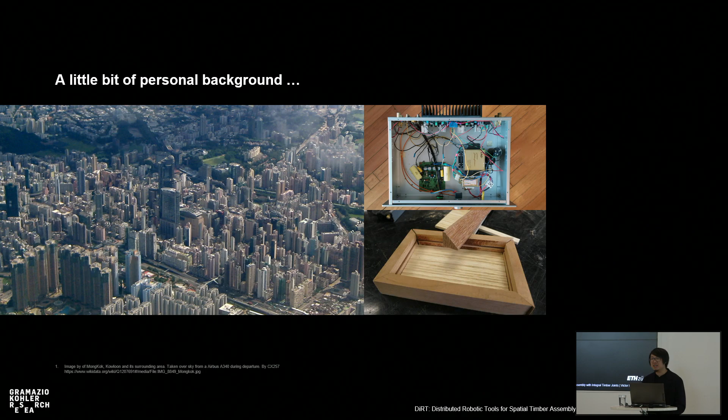Before I introduce my topic, allow me to introduce a little bit of my personal background. So I grew up in Hong Kong, and if you know anything about Hong Kong, well, there's no space. As a kid, I stayed at home a lot, and thanks to my father's influence, I picked up a lot of indoor hobbies like electronics and woodworking. Being a 90s kid, I also picked up computer programming for fun.

When I entered architecture school, digital fabrication was just starting the revolution. But I immediately clicked with the idea of programming machines to make things. For the two years after my bachelor, I joined a startup company that was trying to build bespoke timber pavilions. It was a three-man show, so I had to do everything from designing timber joints to programming CNC machines. But what I was really proud of, at least from a technical point of view, is the automated workflow from design modeling to the generation of G-code.

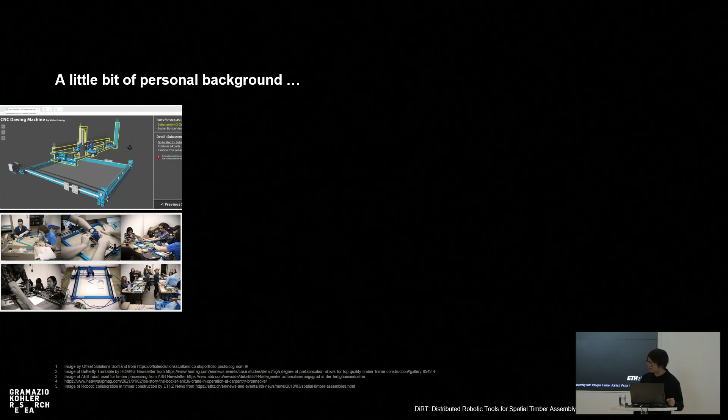However, later on, as I joined MIT for my master's degree, I realized that everybody doing digital fabrication is doing the same thing. So I decided to look at what is the next step after machining, and that, for me, is assembly. My thesis back then, which provided the groundwork for what I'm presenting today, was about how designers can spend a little bit of extra effort during modeling to annotate the assembly motion and sequence of things. That information can be used to generate interactive instructions for showing how things are put together.

The topic that I'm presenting today may look larger and more complex than putting toys together. But it is the same motivation and the same curiosity of extending digital fabrication beyond fabrication to the assembly process that follows it. The title of my PhD thesis is Distributed Robotic Tools for Spatial Timber Assembly with Integral Timber Joints.

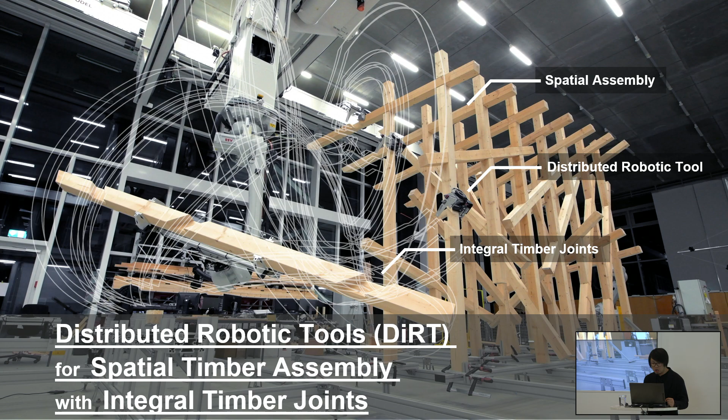Distributed robotic tools is a term that I invented to describe the robotic end effectors that are detached from the robot, which is the focus of this study. Spatial timber assembly refers to assembly that happens in 3D space, as opposed to planar assembly that are 2.5D. Integral timber joints often refer to tight-fitting carpentry joints, but its defining characteristic is really about the structural load that is transferred from wood-to-wood connections.

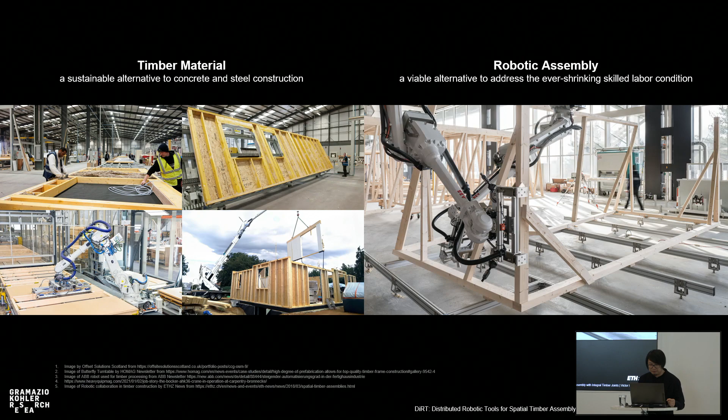The larger picture that motivates this research is that automated timber assembly is becoming more and more relevant. Timber as a construction material is re-emerging as a potentially more sustainable alternative than steel or reinforced concrete. Robotic assembly can also be a viable alternative to address the lack of skilled labor in the construction sector. Moreover, our institute is one of the very few places on Earth that has a large-scale robotic facility, the RFL downstairs, that is capable of developing and prototyping robotic processes at an architectural scale.

Now, let me start with a short summary of the current state of automation in the field of timber construction, looking at it from the perspective of how information and material are combined during construction.

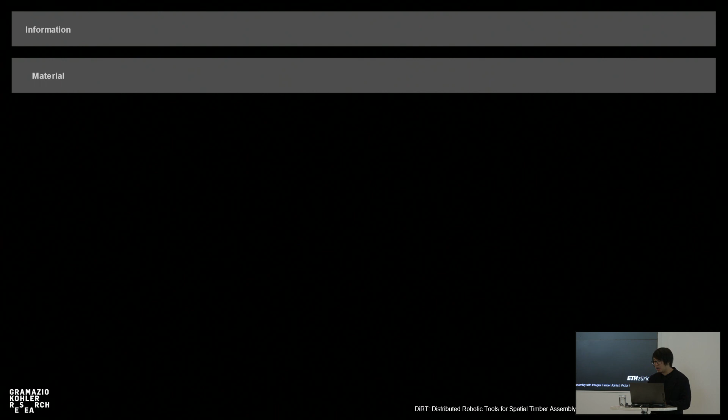The first step in the timber construction process is raw wood processing, which is already a highly automated process with a mass production paradigm. The second step is the beginning of a data-driven and design-driven process.

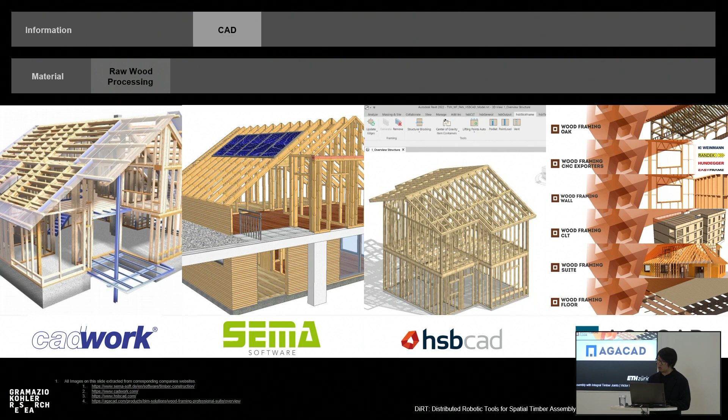The workflow includes architectural design, joint design, and structural engineering. In order to support this information-intensive workflow, specialized CAD software have already been developed by the industry.

For the fabrication of timber parts, automatic joinery machines have been developed for more than 30 years, and there are a handful of manufacturers that make them. In general, planed timber elements enter the machine from one side, get machined, and exit from the other side. Inside the machine, there are different machining tools for making all the joints needed for an entire timber project.

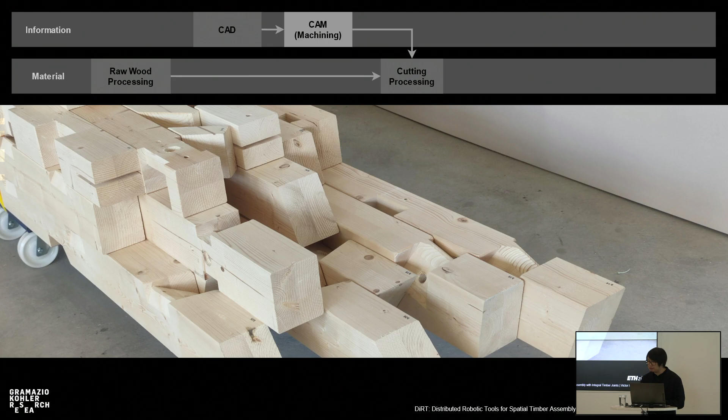However, what is special about this machining process is not just the machine, but rather how the machining programs are generated automatically. You see, in timber construction, there are many geometrically unique components, and if they are processed using a traditional CNC workflow, a programmer would need to click through every one of them.

Fortunately, in the timber machining industry, this step is mostly automated, allowing the CAM software to automatically parse each and every unique component and generate their machining programs automatically. This workflow is quite unique, and it means that not only are the joinery machines automated, but the generation of data that would go into these machines is also automated. The automation of these two parts, the digital and the fabrication, are the fundamental components for digital fabrication.

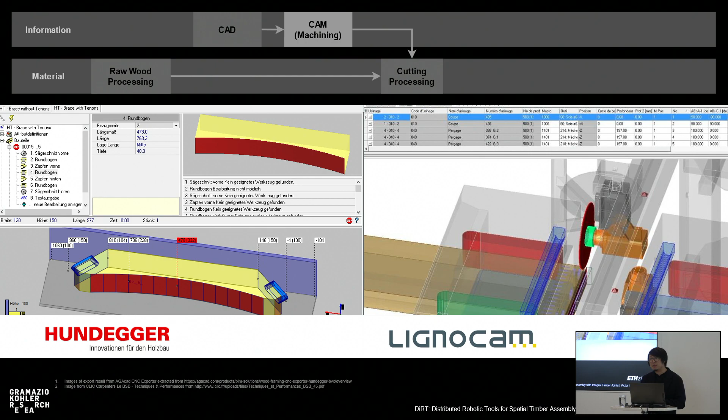In contrast to the machining process, the automation for assembly, which is the core topic of this thesis, is less developed. In the industry, the advancement was mainly focused on the assembly of planar prefabricated parts. For example, machines have been developed for light timber frame construction. These automatic systems combine timber machining and various assembly stations for making prefabricated walls and floors.

Similarly, the assembly of floor trusses and roof trusses. You may notice that all of these machines look like an assembly line. In fact, these machines are often optimized for a specific geometry and therefore are not so flexible for accommodating custom designs.

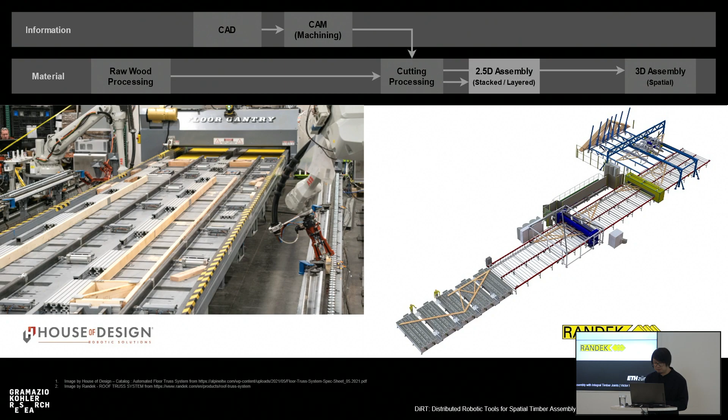In addition, the CAD and the CAM software for designing these assemblies and controlling these machines are proprietary systems. This limitation, combined with an inflexible machine setup, limited their application to utilitarian designs. In many cases, these timber components are designed to be hidden away from the architecture, and therefore we are not very interested in these things.

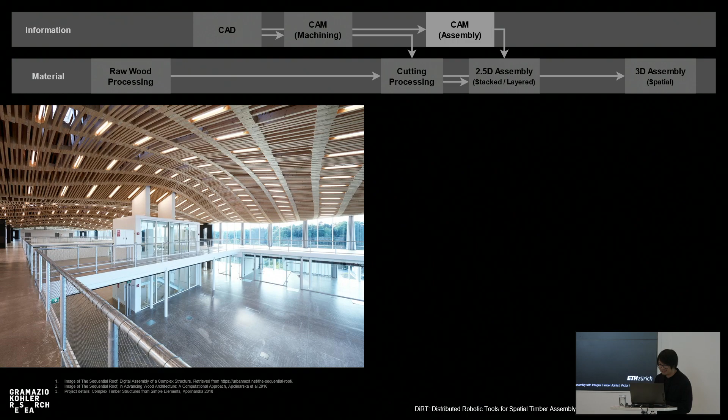Perhaps a counterexample of a very complex yet attractive design is the sequential roof that is right above us. Despite its fluid appearance, it is still a planar assembly. Notice that the automated gantry robot for assembling it is not even as complex as the robotic production lines we saw. The main difference, I think, is the automation of the digital workflow.

In this case, it is not just the cutting instruction that is automated, but also the assembly instructions for the robot. While this project has demonstrated a high level of automation for bespoke planar assembly, my thesis investigates whether similar automation can be applied to robotic arms doing spatial assembly.

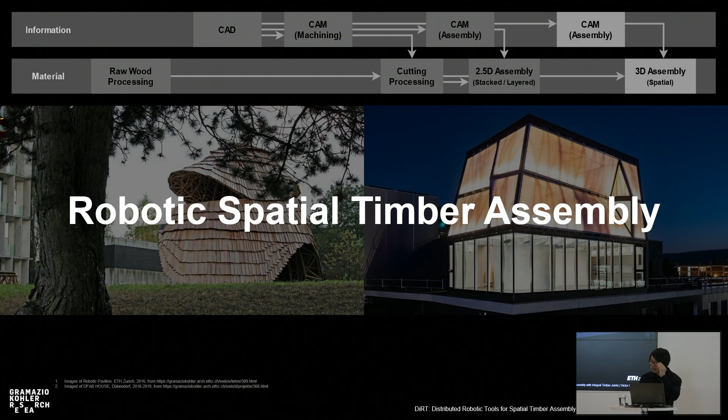So what is special about spatial timber assembly? There are many things, but one thing for sure is that we don't find many examples in the industry, and the state of the art is mostly in research projects. For example, the MAS DFAB Robotic Pavilion that some of you actually participated in, and the DFAB House Spatial Timber Assembly.

The challenges involved in spatial timber assembly can be roughly characterized into 4 types. I will explain what they are using the DFAB House project as an example.

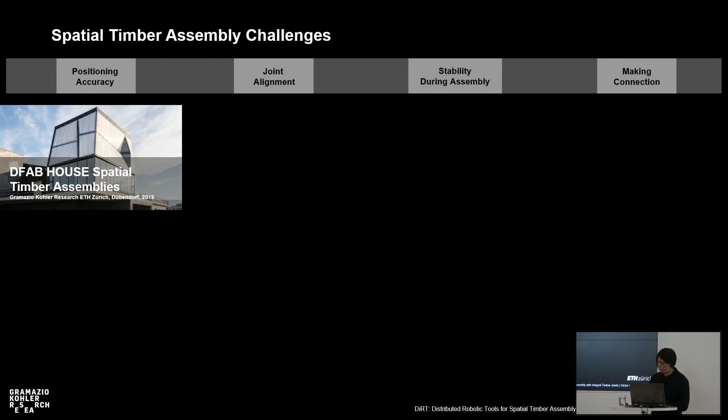Being one of the earliest spatial timber assembly projects, the researchers found that the accuracy of a large-scale robotic platform is much lower than what is needed for timber assembly. And this is the first challenge, positioning accuracy.

Fortunately, our lab is equipped with an indoor optical tracking system called the iGPS, which can monitor the position of the robotic gripper accurately and therefore make closed-loop corrections. However, when dealing with long timber elements, the accuracy at the 2 ends of the beam is much worse than the middle. The researchers found that it was not possible to assemble simple joints like this one.

This is the second challenge, joint alignment. In this project, the researchers decided not to use integral timber joints at all, and they circumvented the problem by using butt joints, accepting the misalignment, and fixing the incorrect geometry later.

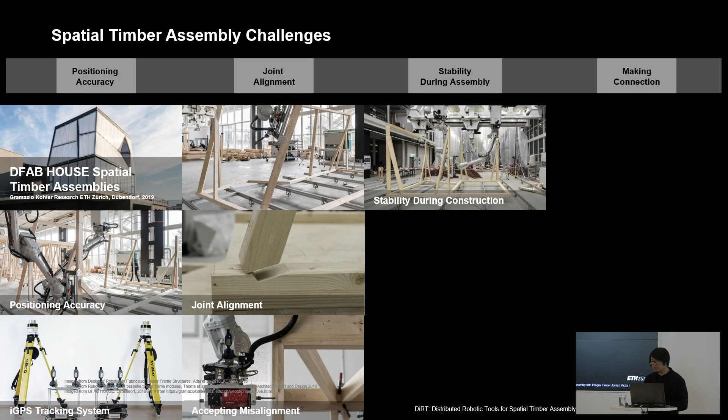The third challenge is stability during assembly. This is the major difference between a planar assembly that can be easily supported on a planar platform and spatial assembly, which because of gravity tends to fall down. Here, the researchers addressed this problem by first assembling the corners of their modular timber boxes, which formed a stable tripod to support the rest of the structure.

Finally, the fourth challenge, which is also the problem that is least addressed, is how to make connections automatically. In the DFAB House project, this is not addressed at all. The robotic process has to be stopped, a worker has to set up a ladder, install the fasteners, and this back and forth repeats for every timber element.

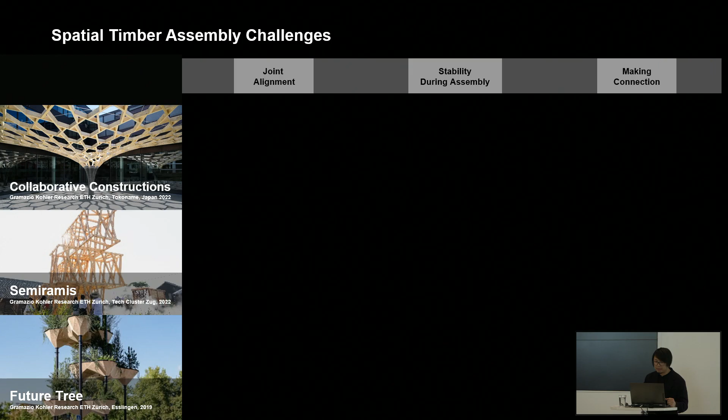Among the 4 problems, only the positioning accuracy problem is more or less resolved. The other 3 problems can be seen in other spatially assembled timber structures, in one way or another. These challenges limited the choice of timber joints for robotic assembly, and in many cases, to structurally less efficient ones. In some of these examples, the robotic process even required more manual operations than robotic operations.

The only relevant robotically assembled timber joint project is a research called Robotic Integral Attachment. The researchers found that using a robotic arm to push tenon joints into the mortise side is not a good way to tighten them. Although they did not explain in detail why, I do suspect that the pushing force from the robot is not enough, and the fact that they are pushing only from one side.

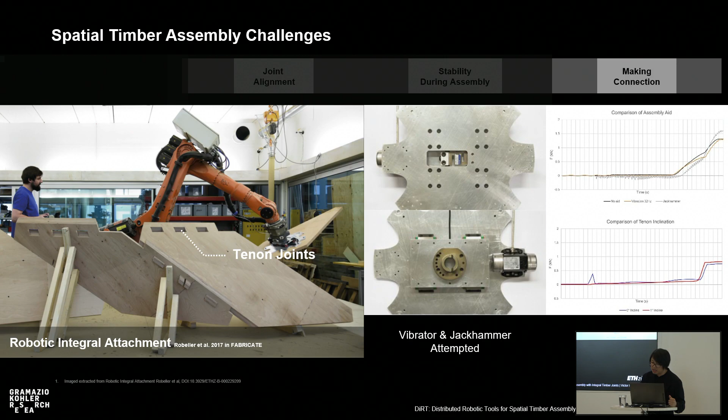While these previous projects may have addressed 1 or 2 of the challenges that I mentioned, a combined solution has not been attempted before, and therefore I decided to use an exploratory research method to conduct this thesis.

This method may be unfamiliar to some of you, so here is a short introduction to what you're about to see. I started the exploration by developing an assembly method that is considered a working hypothesis. While this hypothesis did not solve all the problems at once, it is through many observations and small iterations that the hypothesis was refined and improved. And it is during this iterative process that knowledge is generated by making new discoveries and understanding new relationships.

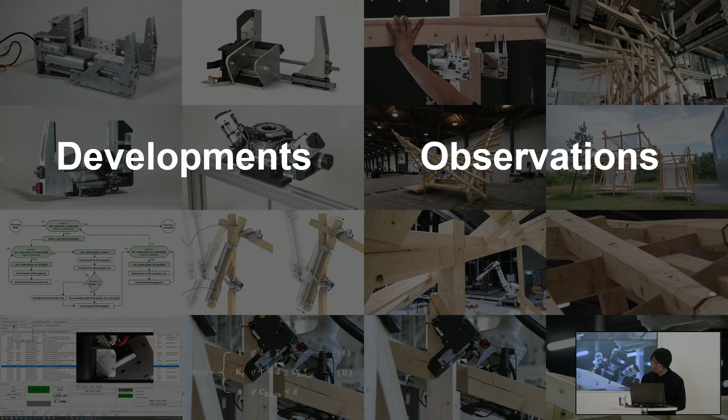In the rest of this presentation, I want to give you an idea of what these developments and observations look like. However, because there are many topics and limited time, I will only be able to say 1 or 2 sentences for each of these topics. If you're interested in some of them, I'm happy to get into the details after the presentation. If you find it hard to follow, I promise it will make sense at the end. So, let's begin.

The entire thesis can be divided into 5 exploration phases. The first phase started with prototyping of a clamping tool. The second phase went on to test the clamps with the robots. The third phase focused on complete automation of both the digital and the robotics workflow. The fourth phase tested a screwdriver concept. And the fifth phase focused on integration with other disciplines.

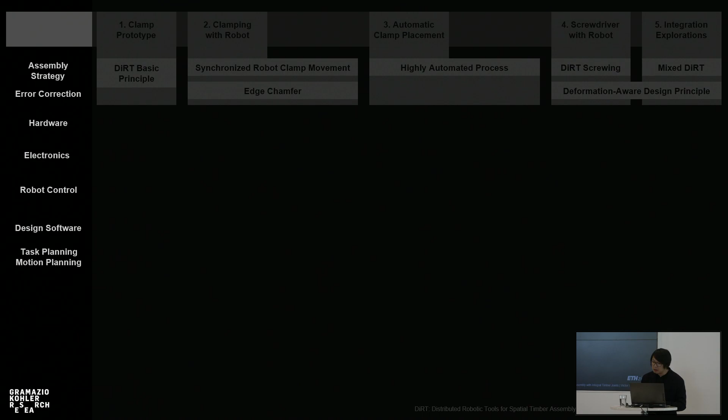These descriptions are extremely simplified. In reality, each phase contained many developments and experiments. For example, the development of assembly strategies, such as how to apply assembly force and deal with inaccuracy. Mechatronics development, including hardware, electronics, and control software. Finally, similar to my master thesis, studying how timber structures can be designed such that the robotic assembly instructions can be automatically generated.

3 large-scale demonstrators were designed and constructed during rounds 2, 4, and 5. And after each phase, a thorough analysis was performed to understand what is working, what is not working, because understanding why is the most important goal in this thesis.

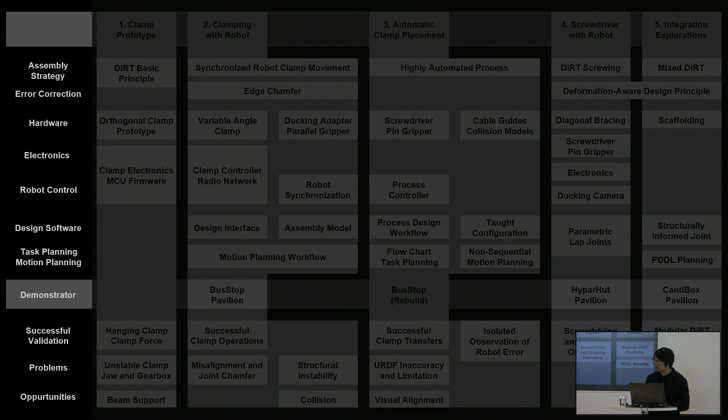In the first exploration phase, the focus was to start by addressing the problem of making connections. By observing manual assembly processes and the tools that they use, I had the idea of deploying multiple assembly actuators, 1 at each mating joint. By using multiple actuators, it is flexible to position them wherever the joints are located. However, it would be difficult if each of the actuators requires a robot to hold it. Not only because robots need space to maneuver, but because it is not scalable.

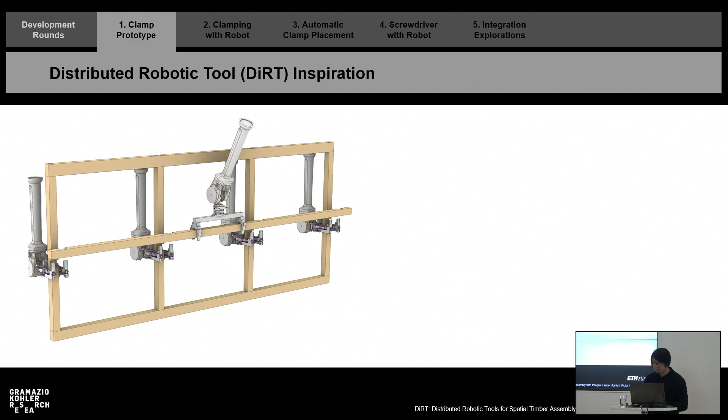Therefore, I hypothesized a scenario in which the actuators are attached to and hanging from the partially assembled structure. The attachment of the tools can therefore be performed even with 1 robotic arm. After all the actuators are in place, the same robotic arm can bring the next piece of timber towards the joint for the assembly. Because these actuators are no longer tethered to the rest of the robotic system, I call this a distributed robotic tool approach, and therefore the acronym DiRT.

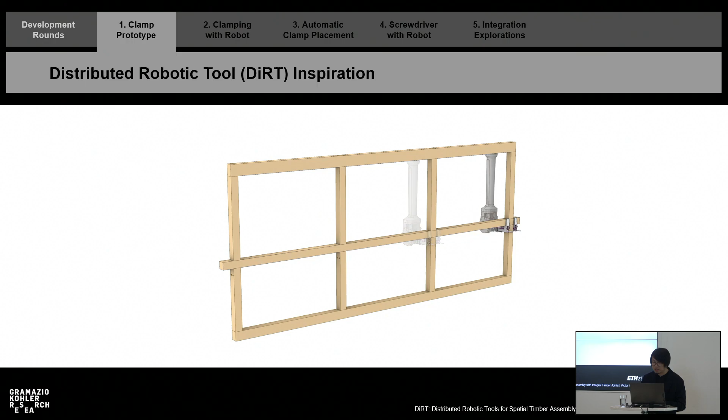One of the challenges of using distributed devices is to control them to make them move synchronously. In addition, the robot needs to attach the tools to the structure and to retrieve them afterwards. The first prototype is a robotic clamping tool, designed to assemble lap joints that are 90 degrees.

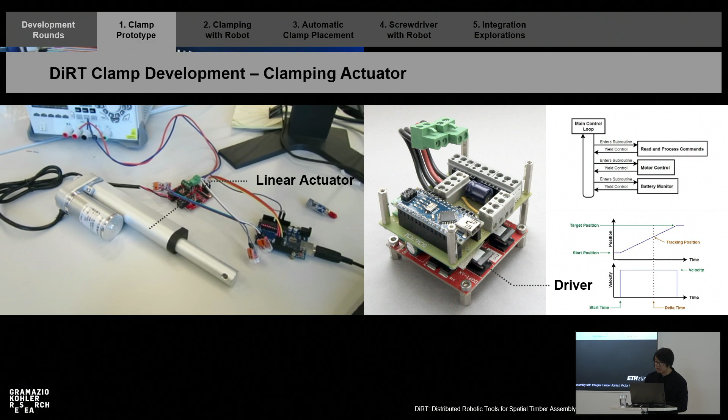I started by measuring the clamping force required for tight-fitting lap joints. This gave me an estimation for the selection of linear actuator and motor driver used for the clamping action. Then I designed a hanging mechanism that would allow the clamp to hang onto the wood.

This proof of concept device allowed me to test two of the most important operating principles in the DiRT concept. The first is the ability for an end effector to operate while hanging from the timber beams. Apart from the orientation you see here, other orientations have also been tested, and the hanging works pretty well.

The second is the application of assembly force locally at the joint. The clamping mechanism operated smoothly without any wedging or jamming effect during joint closure. This is interesting because lap joints with parallel faces behave like an old wooden drawer—you need to close them carefully while ensuring they're parallel to avoid jamming.

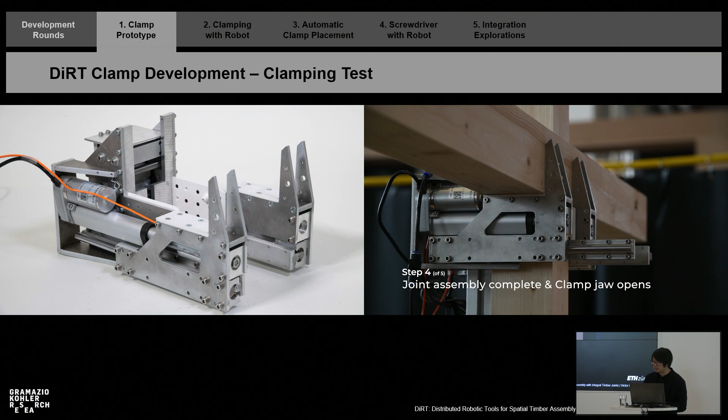However, what was found here is that jamming is not a concern, which also means that many traditional lap joint designs can be clamped robotically.

Regarding the mechanical hardware, one of the actuators broke after I repeated the experiments a few more times. However, this was actually good because it gave me a better idea of how to design the hardware in the next iteration. Specifically, the design philosophy is now that the motor should enter protection instead of mechanically destroying itself.

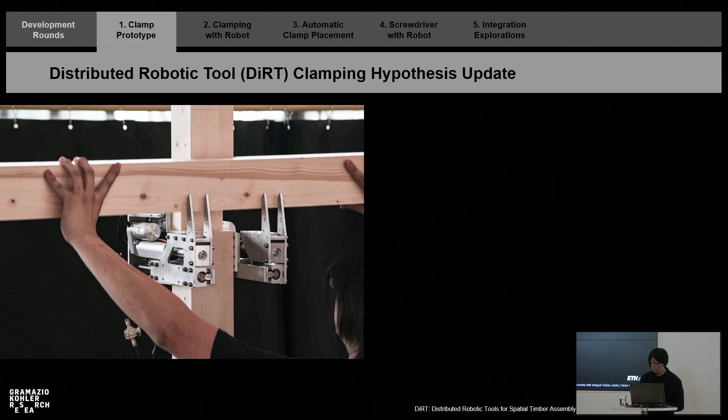Regarding the assembly strategy, the demonstration also revealed a serious problem with my initial hypothesis. The idea that the robot can let go of the timber and give it to the clamp is not very generalizable, and that can only work in this perfectly balanced posture.

Therefore, in subsequent exploration, I decided to have the robot hold onto the beam and support its weight during clamping. This way, the clamp does not have to support the beam, and the beam is free to be in any orientation.

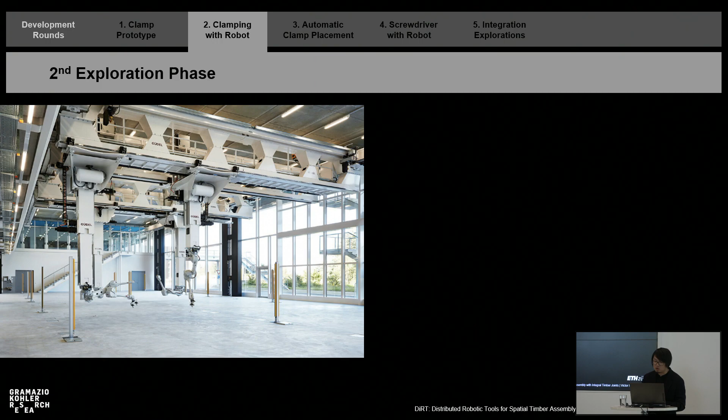In the second exploration phase, it was much more ambitious. The goal was to integrate the clamps with the robotic arm in RFL and to test their operation by assembling a large-scale demonstrator. Another ambition is to redesign the clamp to accommodate angled lap joints.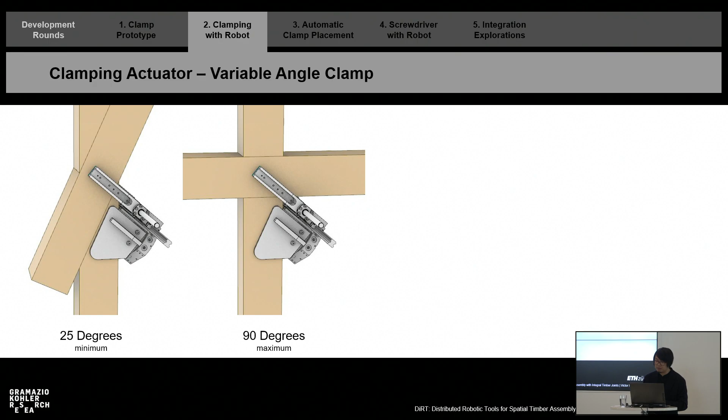The new clamp design used only one clamp jaw instead of two and relocated the hanging gripper mechanism to the side of the beam. This way, the clamp can accommodate lap joint angles ranging from 25 to 90 degrees, and a mirror version of the clamp was designed to accommodate angles from 90 to 155 degrees.

On the electronics side, an embedded controller was implemented to control the motor and to allow wireless communication. The motion control algorithm is key to allowing synchronization between the clamp and the robots.

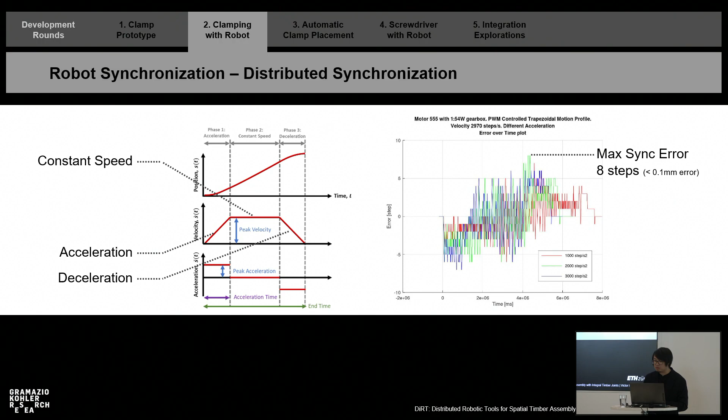The principle is based on a mutually agreed motion profile that would start and end at the same time. The wireless network was also a custom implementation, optimized for low latency and high reliability even when there are occlusions.

The synchronization control is based on a concept called distributed control system. It allows individual robot controllers, such as the clamps and the ABB robot controllers, to report to a top-level controller that is responsible for their synchronization.

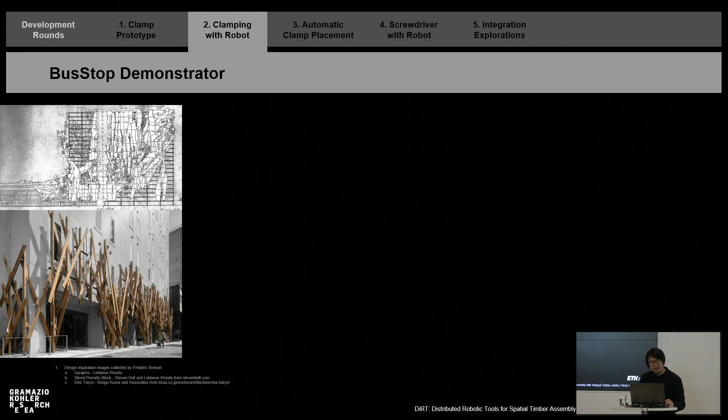Finally, the large-scale demonstrator was designed by an MAS student, Frédéric Brisson, also in collaboration with Dr. Davide Tanadini from the chair of structural design. He is a long-term collaborator under the same NCCR research umbrella.

While the demonstrator was intended to look good, it is also intentionally designed for studying different clamping orientations, with up to 3 simultaneously moving clamps. Apart from those, there are some foundational pieces that have to be fixed manually to the ground.

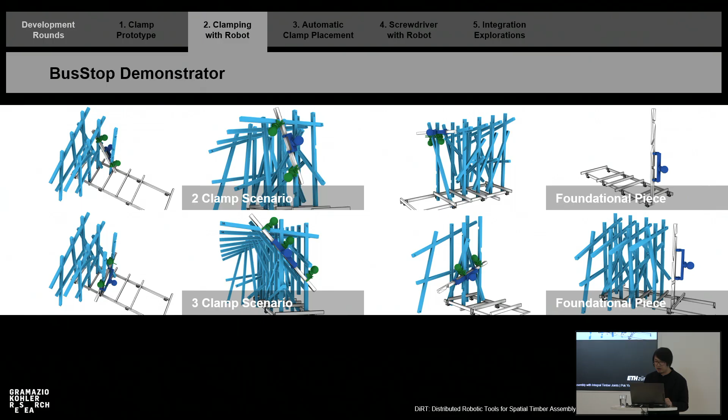Being the first large-scale demonstrator, the focus was to validate the most difficult part, which is the synchronous clamping movement. What you're seeing here is the robot using a parallel gripper to support the weight of the beam during the clamping operation.

While the synchronous motion worked very well, the main challenge was the poor alignment between the two sides of the joint. Here, different from the precedent project, the iGPS tracker was not used because of the amount of timber elements that would block the sensor from seeing their reference stations.

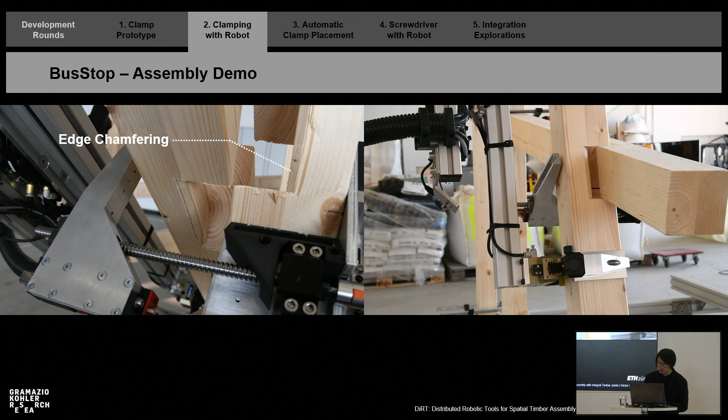Therefore, my plan to address misalignment was to introduce chamfering on the joint edges. When the joints are forced together by the clamps, the chamfering can provide a ramp that would guide the two halves into alignment. During the demonstration, I found that 5 to 8 mm of chamfering works most of the time.

However, in some cases, the misalignment was too big, and there was no option but to manually push the structure until they aligned.

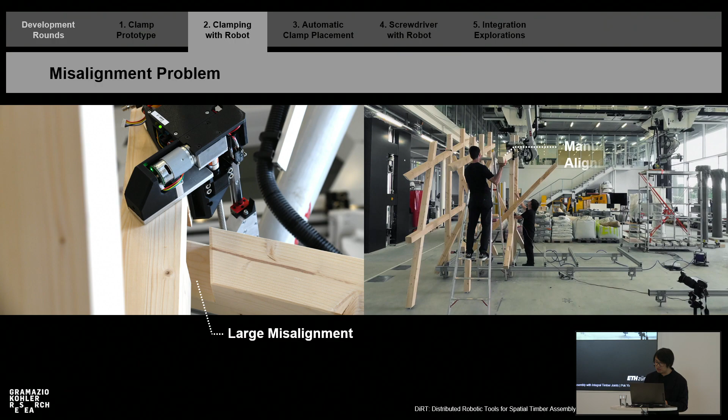In order to understand the misalignment problem better, I systematically analyzed the deviation error on the robot side and on the stationary side. On the robot side, I found that the mechanical connection between the robotic arm and the bottom of the gantry was not calibrated.

I also found that the Z-axis of the gantry is not stiff enough. This caused the entire robotic arm to swing from side to side by a small amount when the axis is fully extended. Finally, I found that the position error at the end of a long timber beam to be more significant than what I had hoped for.

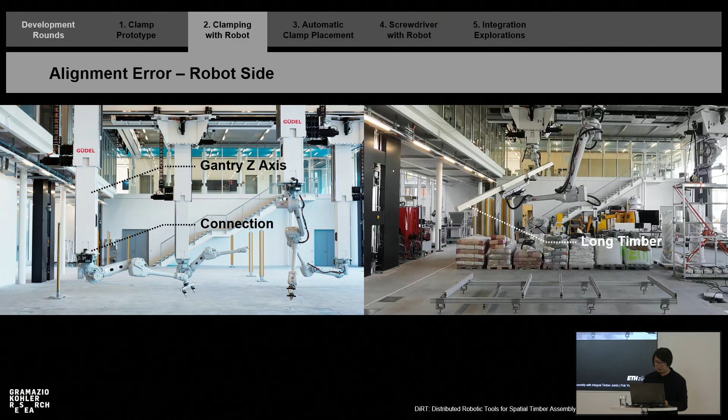On the stationary side, I found that the partially assembled structure can deform quite significantly, especially for the poorly supported beams. After all, the structure is by definition incomplete during assembly. This discovery inspired a new deformation-aware design principle in the fourth and fifth exploration, which we will explain soon.

In addition, I also found that lap joints in general suffer from low initial rotational stiffness, which is kind of a fancy way to say that there is a gap. Finally, the joints are simply held by friction, and they have a tendency to open up during the subsequent movement when there are small vibrations.

This discovery motivated the development of a screwdriver tool that I will show in the fourth exploration.

The second major test on this prototype is the beam transfer action. It is the robotic movement that brings a timber element through the obstacles into the partially assembled structure.

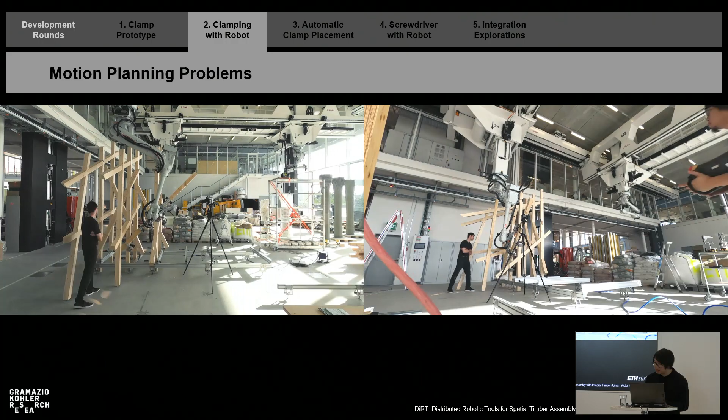Unfortunately, even using the latest motion planning algorithms at the time, they often cannot find a solution even after searching for a long time. In some cases where the algorithm returns, the solution can still be incorrect and contain collisions.

Fortunately, I got help from a motion planning specialist, Dr. Yijiang Huang, previously from MIT, now in ETH. Not only was he able to identify the cause of the collision problem, he also developed a custom collision checking algorithm specialized for timber assembly.

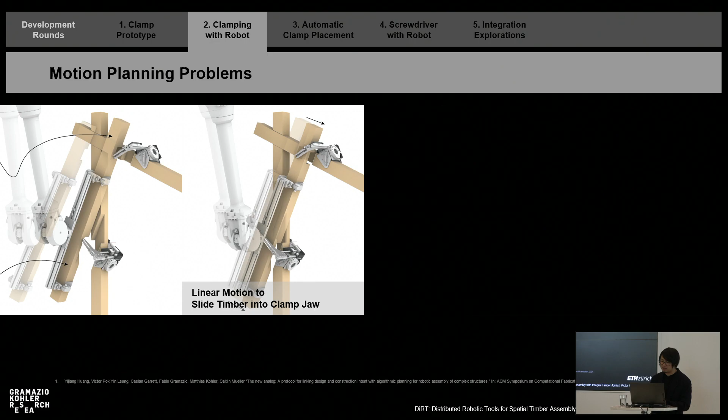We also added a short segment of linear motion to slide the timber into the clamp jaw, which turns out to significantly increase the planning success rate. Here you can see the linear sliding movement before the clamping movement.

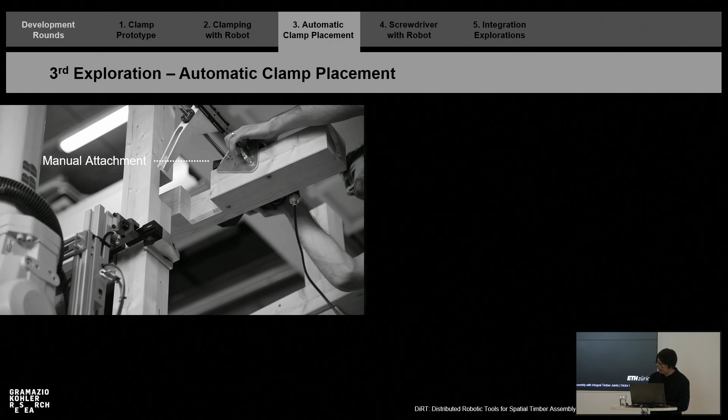The goal in the third exploration is to test the rest of the robotic process that was not yet tested. The highlights being the robotic attachment and detachment of the clamps on the structure. No new demonstrator was designed for this phase because the bus stop demonstrator can be used again for the new tests. The major challenge in this exploration is to plan the sequence of tasks that the robots needs to perform.

In collaboration with Yijiang, we came up with an easy-to-use method for planning assembly instruction. The idea is to describe a robotic process as a series of actions in a flowchart. Loops and conditionals can be used to control the sequence of events. Every time the flowchart encounters a white box, an action is performed.

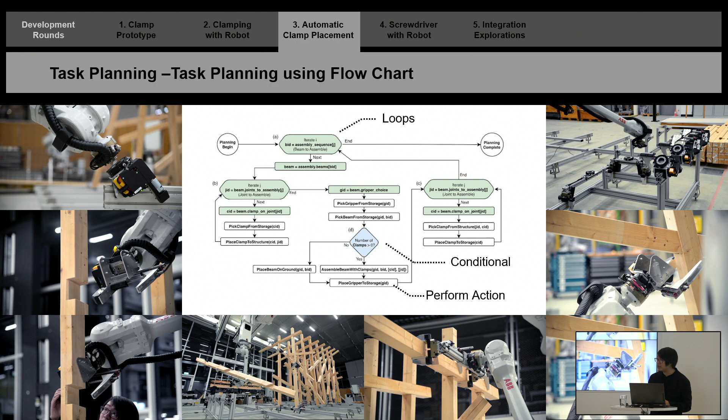This white box is actually called an action group. Within it, the designer can specify the actions of the robots, the tools, and can even include manual operations. Different action groups can have different combinations of these actions, and once they are specified, they can be used in the flowchart in any order, and can even be reused in a different project.

Once the motion tasks are determined, the robot's Cartesian targets were computed automatically. These geometrical data were extracted from the design model of the timber structure.

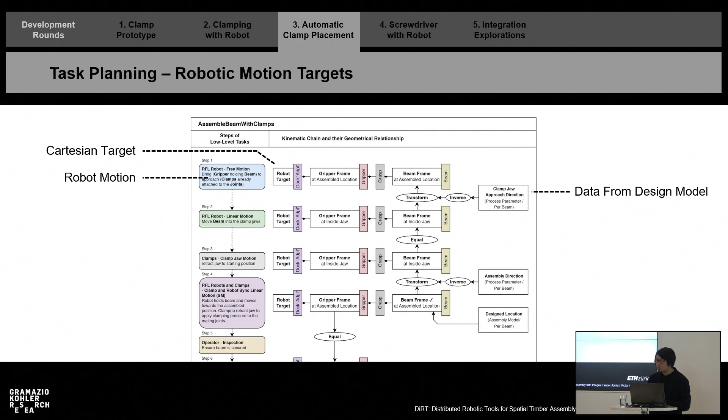Once the tasks are planned, it needs to be filled with trajectories. Here, the new challenge is that all the motions are chained together, so planning one trajectory affects the others. Moreover, there are some trajectories in the list that are more difficult to plan, and those have to be planned first. In order to address this, we came up with a method to plan non-sequentially, while ensuring the trajectory space continuum.

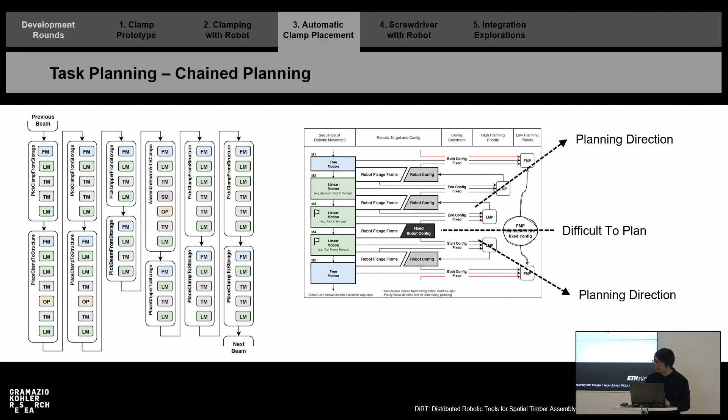Here you can see the results of the more optimized motion planning. The long beam successfully navigated around the obstacles before sliding into the narrow passage of the clamp jaw. Here is another test of holding the timber using an unbalanced posture, and that was found to be okay as well.

Here you see the robot picking up a clamp automatically from the storage station and then bringing it to the structure. You can see the pre-drilled holes on the column for the hanging mechanism to grapple on.

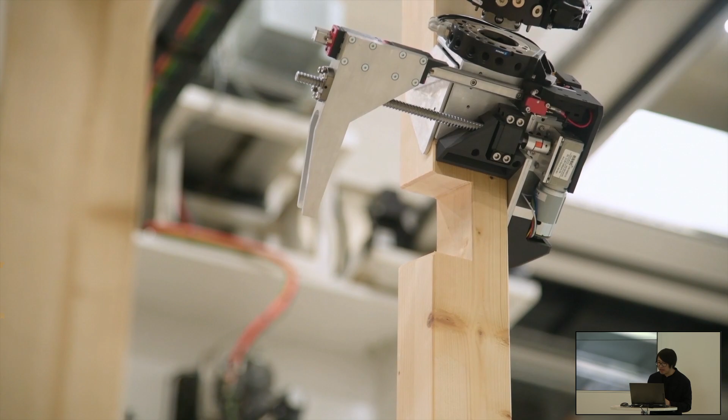During attachment, the misalignment problem was worse than what I have expected, and there are many times that I had to jog the robot with a joystick until the hanging mechanism clicked into place. Here in a different view, you can see me jogging it upwards until the pins align.

When retrieving the clamps, alignment was even more difficult because the allowable deviation of the tool changer is only 1.5 mm.

So I added a wireless camera on the robot side to look at the tool changer during alignment. This allowed me to make adjustments by looking at the computer screen. That piece of paper with a printed scale on it turns out to be much more effective than trying to eyeball the amount of deviation while jogging.

Finally, on the hardware side, I want to fix the collision problems I had with the cables in previous rounds. This is actually a very unique problem for spatial assembly because the robotic arm needs to move in all the different degrees of freedom. Because the movements are non-repetitive, it is difficult to predict the movement of the soft cables and to avoid collisions. Here, I found that the addition of a cable retract system and a wrist cable guide can fix the problem in a reliable way.

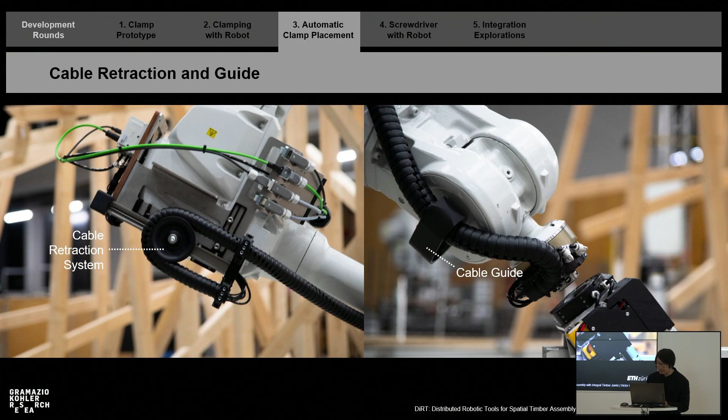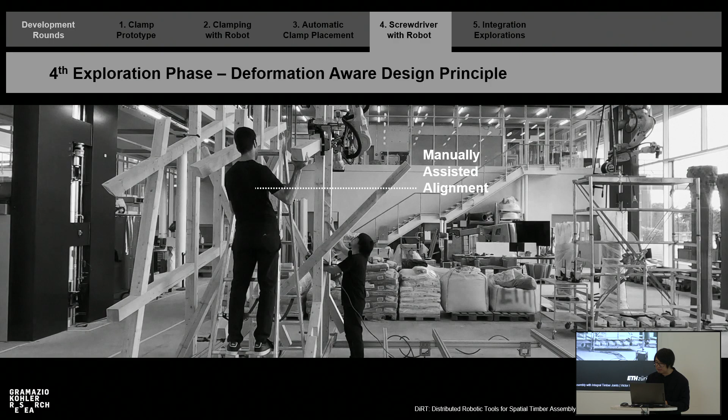In the fourth exploration, the goal is to test two interesting concepts that are high risk but potentially high return. The first concept is an assembly tool based on a screwdriver mechanism. It can expand the range of assemblable joints to include lap joints that are non-planar. The second concept is to address the deformation that occurs in the partially assembled structure. If successful, it could greatly reduce the chance of misalignment during assembly and therefore reduce the need of human intervention.

The first important development is the screwdriver tool. It was developed in collaboration with Mr. Marco Rossi, a mechatronic engineer from OST Rapperswil.

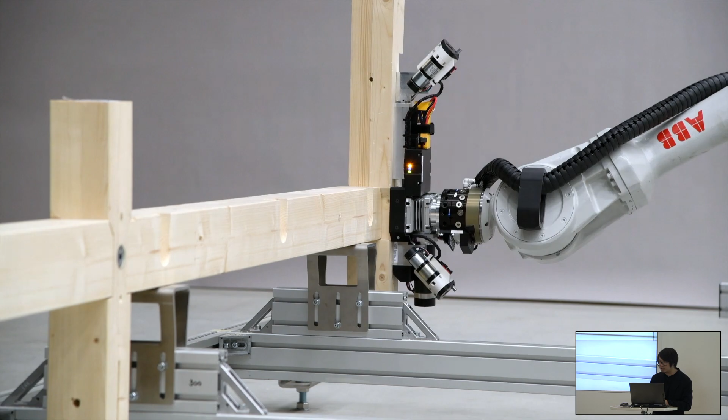The operating principle of the screwdriver tool uses a long screw to pull the two sides of the joint together. The main difference from the clamping mechanism is that the assembly force is in the middle of the joint, not on the outside. The central pulling screw allows the screwdriver to assemble non-planar lap joints. At the same time, the rotating mechanism also allows the installation of a fastener, which can prevent the joints from opening up during the subsequent assembly.

Here you can see an upgraded version of the camera docking system. It uses a calibrated computer vision marker that allows the robot to autonomously align with the docking adapter.

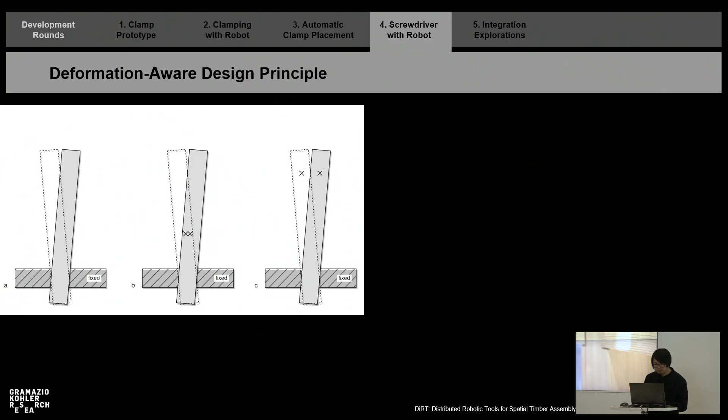The second important development is deformation-aware design principle. The concept consists of two parts. The first is the evaluation of the partially assembled structure to predict instability and to determine if the deformation will affect the subsequent alignment. The second part is a series of techniques for correcting the deformation.

In this example, a diagonal element is designed to be assembled after the column, such that the straightness of the column can be ensured. This correction mechanism relies on the edge chamfering on the joint, and by forcing the joint together, the chamfering acts as a guide to guide the structure back to correctness.

In this example, the addition of this column is potentially unstable, but it does not affect the assembly for the next joint because the joints are very close together anyways. While this column is still unstable on the other plane, the next diagonal element creates a triangle that would stabilize it. For this demonstrator, this is all it needs to create a stable base for assembling the rest of the roof structure.

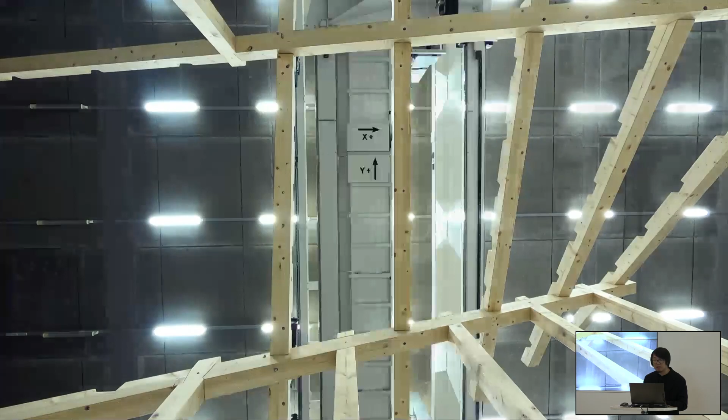Speaking of which, this demonstrator is named the Hyper Hut because the base resembles a timber hut in the Alpine mountains and the roof is a hyperbolic paraboloid. While the Hyper Hut is mainly designed to showcase the ability to assemble non-planar joints, the fact that it is a double curved surface also demonstrates a high structural rigidity that is achieved through form.

Therefore, the roof is supported only by 5 columns instead of 6. The structure also used 3 different types of timber section sizes that correspond to the structural needs. Although the joints have different dimensions, the screwdriver can assemble them all.

Finally, the demonstrator also tested many traditional joint details, such as dovetailed lap joints that can better resist tension, and housed lap joints that have much higher rotational stiffness.

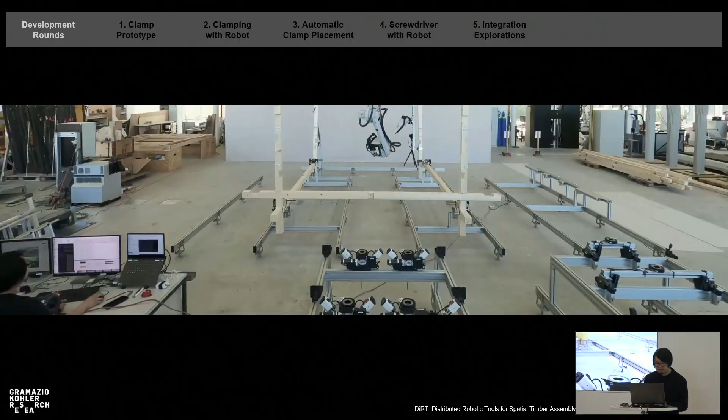By the end of the 4th exploration, the robotic assembly process had already achieved a high level of autonomy, and I, as the operator, was simply monitoring the system and loading material from time to time. Therefore, in the fifth exploration, the goal is to scale up the system by combining both robotic clamps and robotic screwdrivers.

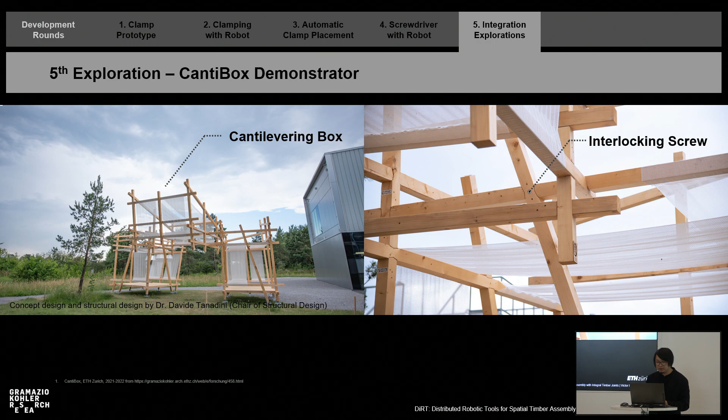This demonstrator in this exploration is designed by a team led by my structural collaborator, Dr. Davide Tanadini. They came up with a reciprocal spatial structure, a box that would require only 4 screws to achieve interlocking. The whole pavilion consists of 3 of these boxes, and since one of them is cantilevering, this demonstrator is called the CantiBox. The main challenge that came from a reciprocal structure is that stability can be very bad before it is completed.

However, I found that the deformation awareness principle can still be applied. Instead of using permanent diagonal bracing, temporary scaffolding can be used to prevent deformation before it happens. The joints used in this demonstrator are also designed by Davide, using a method developed in his PhD thesis. It is able to customize the geometry of each joint based on local load conditions.

From the robotic process perspective, this test demonstrated the flexibility of the clamping and screwing assembly method to accommodate different joint details. On the hardware side, the camera marker alignment method is extended for the attachment of clamps. This eliminated all the manual jogging needed during the clamp attachment.

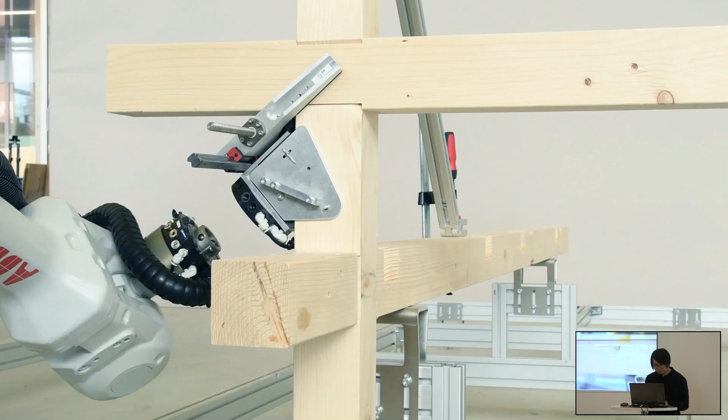My collaborator Yi Zhang also tested an implementation of the latest AI planning method called PDDL Stream. This optimization allowed direct transfer of the robotic clamps from one location to another, thereby eliminating redundant movements between the storage location.

After 5 development rounds and 3 demonstrators, I found myself in a period of reflection, and there were certain tasks in the process that had persistently refused to operate reliably. For example, the joint-to-joint alignment of lap joints and the alignment of screwdriver tips with the pre-drilled holes.

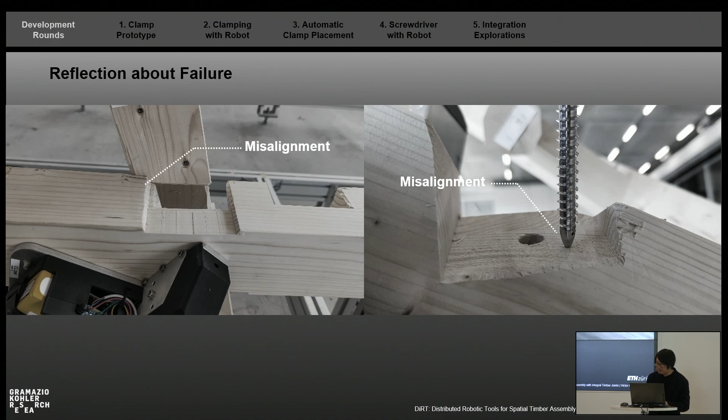There was a spark of inspiration as I looked at the execution logs, and the idea is to think about success and failure as a probability. After all, no industrial process is 100% reliable, and it is only a question of how often it fails and how much failure is acceptable.

There are 2 main factors affecting successful alignment. The first is deviation, and the second is whether there are correction mechanisms used. This concept was developed further into a new hypothesis, which I call the probabilistic method of spatial alignment. The model contains a simple equation that relates the probability of successful alignment to a number of factors.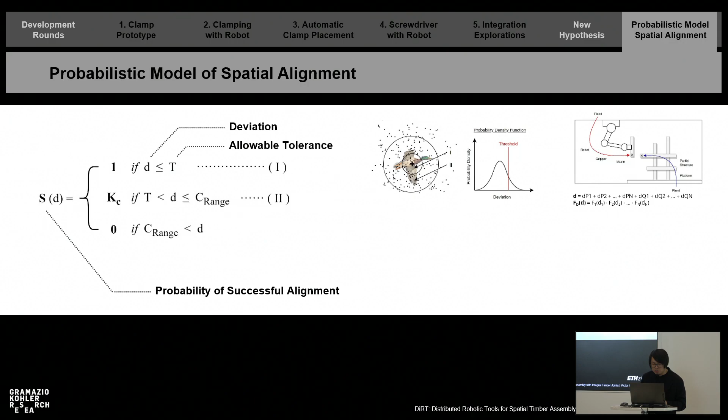The first factor is deviation, which is a random variable that can be measured and predicted with statistical methods. The second is allowable tolerance. And finally, if a correction method is used, its range and probability of success. This concept can be applied to passive correction and active correction methods like these.

This model is extremely useful because it can answer the questions that we always have when designing a robotic process. For example, is the robot accuracy enough? Do we need a correction mechanism? Do we need scaffolding? Or how much chamfer should I add to the joint?

This model can provide a statistical prediction for each alignment action and, by extension, for all the planned actions in the robotic process. While this model is still a hypothesis, it has the potential to be generalizable and applicable for every robotic assembly process in the future.

As we approach the end of the presentation, I would like to conclude by looking back at the 4 grand challenges I laid out in the beginning. The robotic clamps and screwdrivers that I proposed have demonstrated a fully automatic way of making connections.

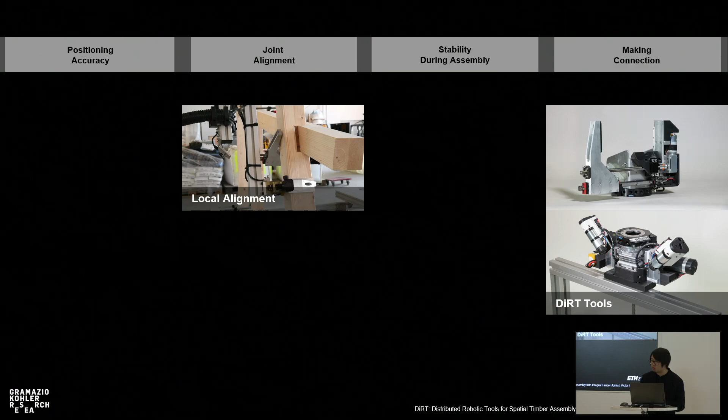The application of assembly force locally at the joints enabled the use of edge chamfering as a way to align tight-fitting joints. This error correction effect was found to be exploitable to provide global error correction to the entire spatial structure.

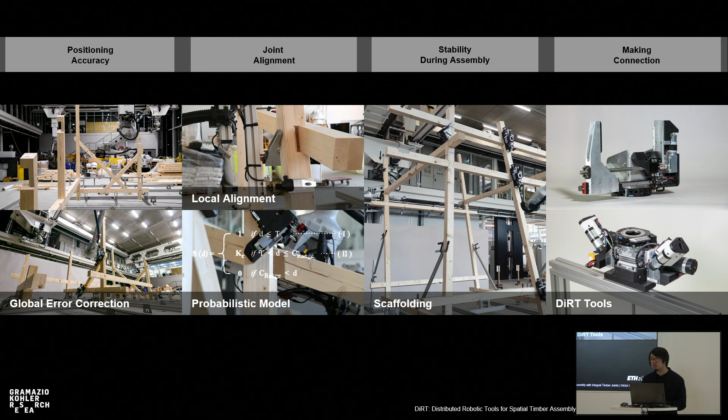This effectively turned the disadvantage of using tight-fitting joints into an advantage that can be used to ensure accuracy. By analyzing the risk of deformation, scaffolding can be planned during design to ensure stability during assembly. While there are still misalignments that are too big to correct, the newly hypothesized probabilistic model of spatial alignment should provide a quantifiable method for addressing this issue in the future.

At the beginning of this presentation, I asked the question whether spatial timber assembly will ever be as automatic as what we are expecting in digital fabrication. I tried to find this out by taking on a journey to develop the technology, and in the journey I discovered new problems, explored their limitations, and identified new relationships. I hope that by now we all have a better understanding of what it means to assemble spatial timber structures.

Looking beyond the topic of timber assembly, the distributed robotic tool concept offers a new way of using industrial robotic arms for construction automation. This method effectively separates the generic problem of spatial manipulation from any process requirements, and you can scale up to use any number of tools without needing a lot of robots. It can be extended to other assembly processes, jointing methods, and even other material systems.

The ability to combine different tools in one unified system and the ability to easily swap between them offers a new way to think about digital fabrication in a much larger picture. We are no longer limiting to making one-trick-per-research-project type of research, but seeing it as a set of robotic skills that can be built up and combined to assemble even more complex objects.

Before I finish, I would like to thank everyone that kept the boat afloat during this journey. Thank you to my professors who have steered the research in the right direction. Thank you to my collaborators who have lent me their superpowers. Thank you to my colleagues who have listened to my troubles and offered me clarity. Thank you to my friends and family members for all the love you have given me. And finally, thank you all for attending this presentation. I hope this is worth your time. Thank you very much.

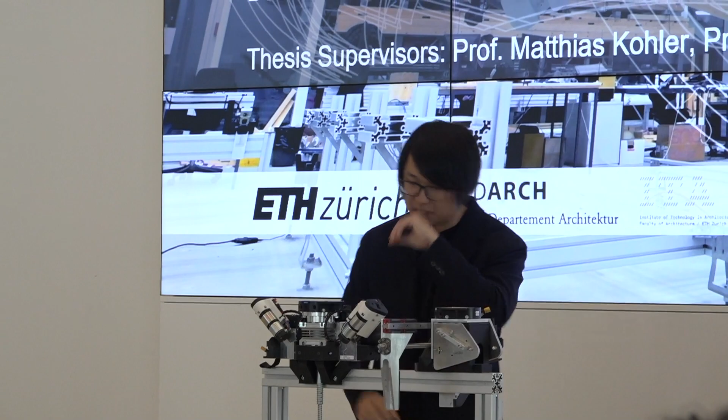For this clamping movement, no, this is position control. For the tightening of the screws, the last moment when I need to tighten the screw to the torque requirement, that part is torque control. So otherwise, to pull the two joints together is position control.

You think that for the clamping system, it's not worthwhile to use impedance control in the future? This I actually don't know well enough.

Let's say the approach I've taken with this one is it's a brute force device. It's designed to be more force than needed, so it will not lose its synchronicity with the robot side. If we enter the area of torque control or impedance control, then it's hard to synchronize with robots that are not under the same umbrella. But this part I do not know.

Yeah, okay, thank you very much. Can I continue? Yeah, okay.

So Victor, let me start by congratulating you for the super concise and exciting, and Silke called it dense, super dense presentation. I was wondering how you were going to do this, because with a written PhD of about 400 pages, also pretty full of details and stories and sub-stories, to boil it down to something easy to understand that makes a nice story, it's demanding and very well done.

I also was thinking, when you were presenting, that a big handicap of the written work is that you cannot use movies that explain things extremely clearly in a very short way. You immediately understand what the problem is, but if you describe this in text and diagrams and tables, it's not easy. Maybe you should also rethink the way this should be presented. I think your PhD, from the point of view of the level of detail you offer to the reader and other researchers, is probably the most comprehensive one, so you almost feel you could start where you left off. I think for this kind of research that's an extremely important quality to consider as part of the research result.

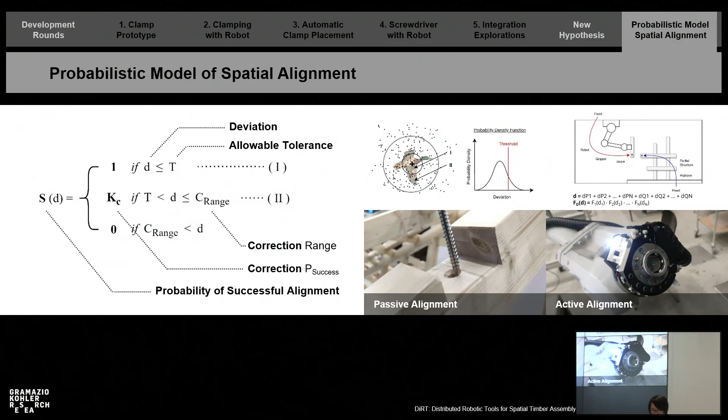Yes, so there are a few data points, super exciting, depending on what parameters you want to feed into the system. Let's say that's a short diagram of what kind of deviation can exist in the system, for example, robotic accuracy. This is something you can both characterize and measure, and for the flexibility of the gantry, you can do statistical measurements that characterize that into a statistical distribution of how wrong it can be. It can even be related to the configuration, for example, if you're constantly holding something, the robot is more likely to deviate, so you can characterize these things. You can collect data, and practically speaking, at the RFL, you would mount a sensor. The IGPS would be the perfect candidate for that, and then measure in different orientations, different payloads, and ideally, because there are so many degrees of freedom, you would want to machine learn it for sure.

For the correction mechanism, that is the design of the camera, how wide angle the lens is, what size the markers are, that will determine the range of how it works, and those are two of the parameters that feed into the equation. Scaffolding, that is structural analysis, classical ones, but it also requires analysis going into this non-deterministic nature. For example, if you have a column, it can either be left or right, it's kind of undeterministic because it's in simulation. That will have to be done in simulation, and there are things called statistical probabilistic structural simulation that give results.

Lucky that Philip left. Just left. And then that is just the amount of chamfer, yeah.

Sure, okay, thanks. Now maybe a bit more, I have two vectors, two more questions to ask. One goes towards applicability. Could you tell a bit about the limitations but also prospects? Maybe I can offer you two ways here. One is, for example, a question of speed and practicability of what you have here. Maybe some reflections on that, and maybe to challenge you a bit or tease out where this could go. If you now were to do a startup on this, what would you do? What would you put out in the market? How far would you need to develop this further to propose something, and what would you propose?

I see myself as an academic. No way out.

Let's talk about speed. The speed of the system is very, very slow. I'm not going to hide this away, it's written in the thesis. It's extremely slow. To give you an idea, clamping together or screwing one joint takes around 5 to 6 minutes. You didn't hear it wrong, minutes to just assemble one joint. With a strike of a hammer, a carpenter can do this in no time.

But at the same time, the point of the thesis is also not trying to chase speed, because this is my DIY stuff. If an engineer actually put time into making it faster, I'm pretty sure it can be very fast.

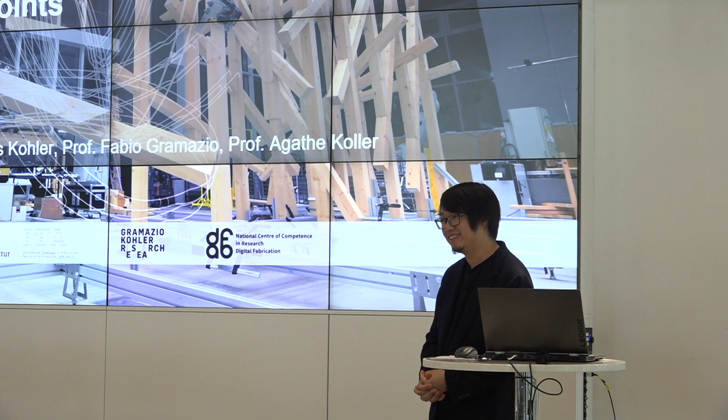I guess my question was also a bit in the direction of — you developed a lot of software, you have planning systems, you develop mechanical components, and you have a timber prefabrication system in a way. Of course, you could also go through parts of what you've developed and say, okay, maybe that part is ready, other parts take some more time.

Yeah, I think there are many smaller areas in my research that are extractable and reusable in many other contexts. I'll just leave it as that.

I'm a bit surprised that you do not — of course you can refuse the question saying you're an academic — but normally if you have an ambitious plan, a long-term plan, something that's very hard and needs time, in an idea you always have some low-hanging fruits, things that could be combined with others already, giving some objective advantages. I can imagine here that not these clamps directly, but the logic behind them — having power tools that are moved manually, that can talk to each other, and can in concert include the humans already on the job — could help in certain specific situations.

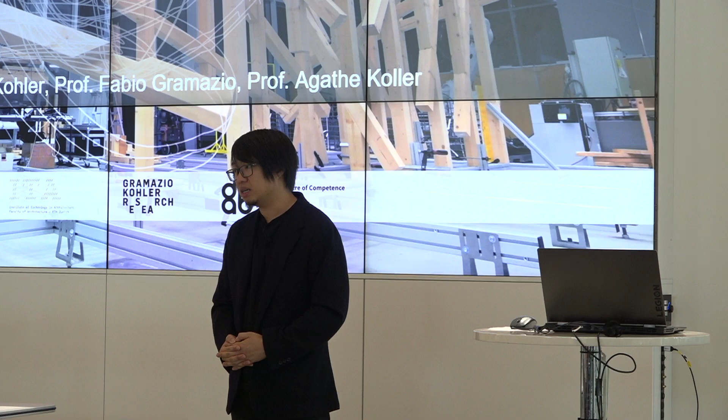May I ask a first question? I know your project is about timber assembly, but I was wondering, have you also thought about disassembling, and could you rewind the whole process?

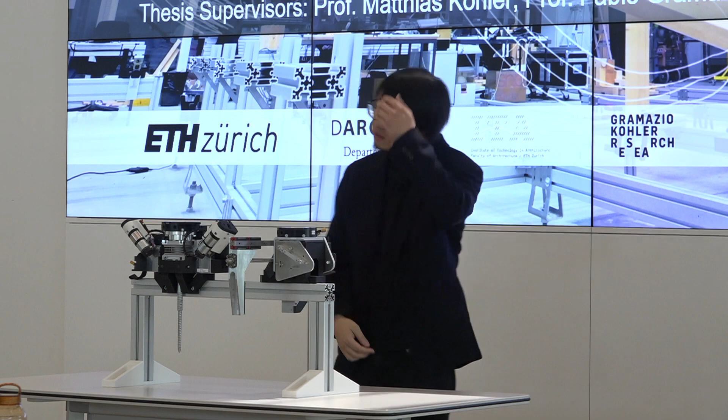Yes, that would be very nice. I thought about this because obviously with a clamp you cannot unclamp. But a screw you can unscrew. A lot of timber structure is dealt with dry joints, so you can totally disassemble the whole thing. Obviously you need to keep very good documentation of the digital model so that later you can rewind the whole thing. This is extremely exciting because if you think about modular construction, like a container box, you can ship it back to the factory, and the factory can do all the disassembly as long as you still have the model intact and the joints are mostly dry joints. Certain things you can drill out, like a rivet, but that would be quite cool. Maybe an idea for a business plan also.

But I would like to hand over. Thank you, Victor, for this very nice presentation. I'm very impressed. My question is all about how can we push this into more of a solid, more market-ready way.

I think first with prefabrication, right? Most of your stuff is doing prefabrication. And I think the key point is that you can make it, if you can make it faster than human, people will accept it more. If you cannot make it faster than human, people will be a little bit concerned. So what do you think is the first thing you will do next to make it faster? And my second question is, of course, we cannot prefabricate a super large house in our factory and ship it, the transportation would be impossible. How do you think your tools can be used on site, and which kind of robots do we need to design to use your tools on site?

Like 2 chapters. Fast first. You know, it's like 2 chapters.

Fast. First, let me say that I don't agree that fast is the only attractiveness in this process. For example, we have a lot of 3D printers down there. It takes, I don't know how long, to print one object. But the only thing you care about is that you press a button and you don't have to look at it anymore, and you come back after a certain time. This is called lights-out production in automation in factories, and that is cool too. You don't need to necessarily be competing with humans in this. If you have a very repetitive product, you can do full automation, and that alone would already be attractive from an industrial process perspective. If you really have to make it fast, the tools are the first thing to improve. Most of the components here are off-the-shelf components. The motors are from my home country, and they could be better. So those can be faster.

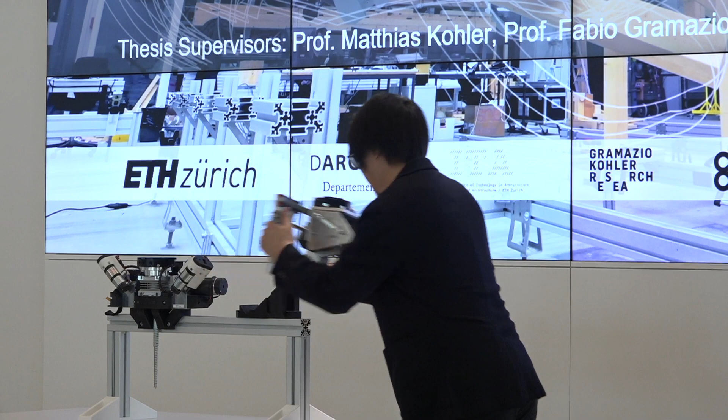Let's say the idea of distributed tools and the fact that they are quite modular. You can imagine this works in RFL, but you can also imagine that a crane on site can dock to this and put this where it's needed. It's quite heavy, but the tricky part is accuracy for on-site robots, whether they can keep up with something like this.

Robots, even though they're made of metal, are still quite flexible, and when things are big, they are even more flexible. That is quite a mismatch for the architecture type of assembly we need to deal with. No matter if you're doing concrete, steel, or wood, the generally expected accuracy is very high compared to such a big robot. So the question is whether robots will catch up in terms of better accuracy or better correction systems, online corrections, or whether the joints we design with - for example, when building a bridge, you have joints that are huge, like tapered concrete surfaces that guide themselves into place. Maybe, but I think that would be the direction if we have to tackle the on-site challenge. It will be tricky.

Are there some other questions?

My question is about, since you mentioned the Japanese efforts - we all know this history of architectural robotics. It started in 1980 in Japan. People began to develop super specialized robots, like ones that clean surfaces - basically one robot with a specific mechanical design for a specific task. We all know it kind of died down in the 2000s. It's coming back, and then we have the second wave in architectural robotics, quoted by Martin Bechthold at Harvard, where architects start to use those industrial arms as ways to connect their design to fabrication. I see your approach kind of moving back to that early idea.

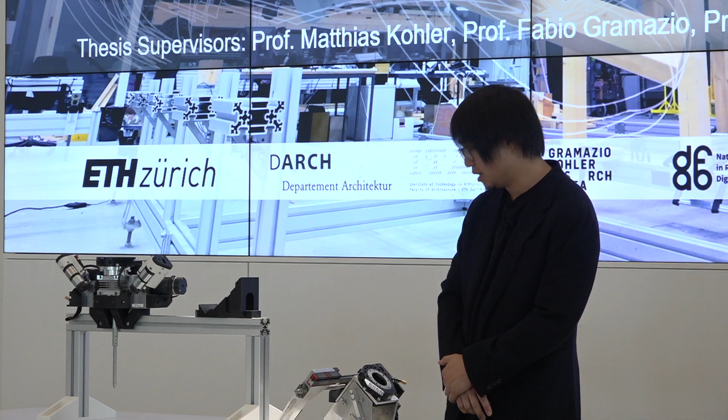Yes, I don't know the answer. It is a very big question where robotics is heading to. I don't know the answer. Construction is a very delicate business, not just about technology, but also about what makes sense financially - probably 90% about what developers care about, and what happens on site is because of financial reasons, not because of whether the technology can or cannot. In fact, if there is a financial goal, usually the technology will happen.

The situation in Japan, as I have read, is quite unique, and that is also related to the social construct and how the economy is arranged, which enables certain exploration. I don't know if other countries, institutions, or private companies can really do this. But one thing for sure is that investing in smaller tools like these is cheap, very cheap - this is about $2,000-ish, not counting my labor. It's a very easy entry point for small research endeavors to start, like my project, which is on a short budget. But since we already have the RFL, which is already there, people can tap into it.

Let's say someone who wants to create a startup can tag along and say, hey, I want to test this sort of mobile thing - maybe it assembles not timber but steel, concrete, or glass, I don't know. Can we try to do the spatial work with the RFL robot and bring this thing to test? That is a much easier entry point, which goes with the startup idea you talked about. Financially, that is most likely to work better than trying to come up with a new company that would build a big machine bigger than a building and put these things inside. That is, I think, very difficult to start.